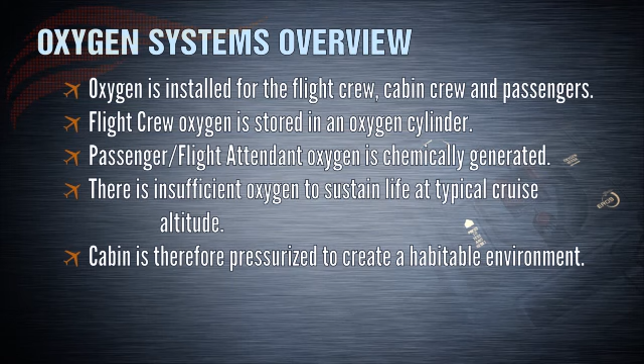Oxygen systems are installed in the aircraft for the flight crew, cabin crew, and the passengers. Flight crew oxygen is stored pressurized in an oxygen cylinder, and oxygen for the passengers and cabin crew is chemically generated. At typical cruise altitudes, there is insufficient oxygen per unit volume of air to sustain human life. The aircraft is therefore pressurized to create a habitable environment. In the event of cabin depressurization, supplemental oxygen is required to sustain consciousness during an emergency descent.

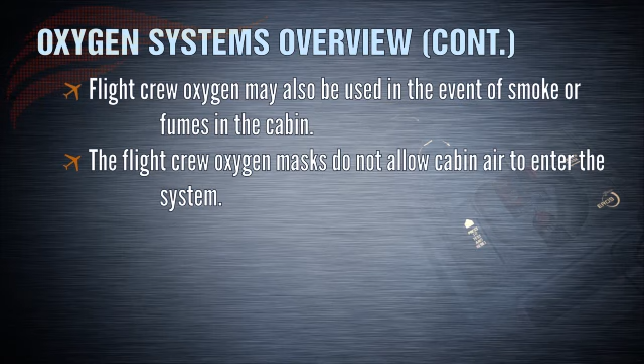Flight crew oxygen may also be used in the event of smoke or fumes in the cabin, as the flight crew oxygen masks may be sealed completely, preventing cabin air from entering the system. The passenger oxygen masks combine oxygen with cabin air, however, so will be of little use in the event of smoke or fumes in the cabin.

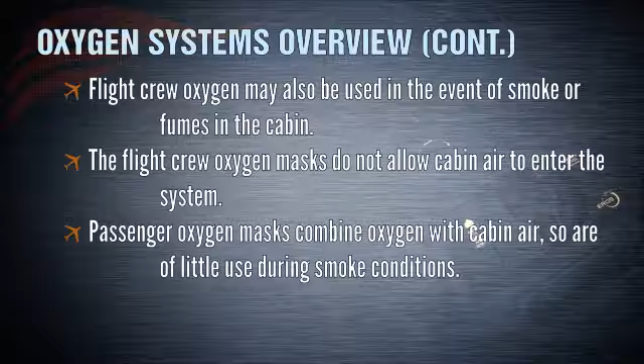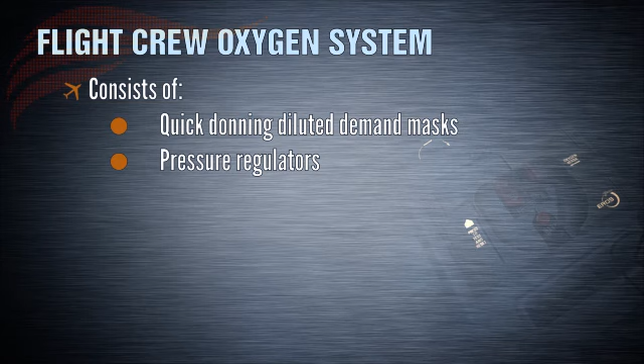Controls and indications for the oxygen systems are located on the masks beside each crew station and on the aft overhead panel. The flight crew oxygen system consists of quick donning diluter demand masks and pressure regulators located at each crew member station and other system components.

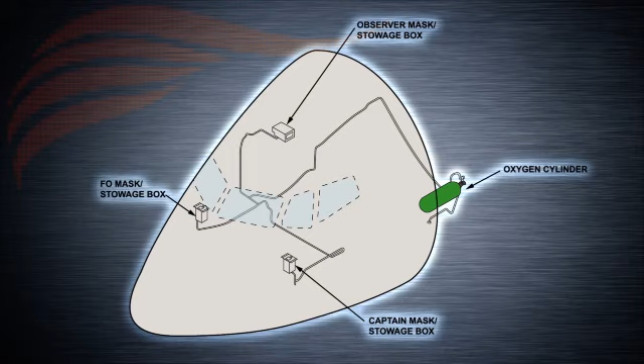There are 3 masks on the flight deck, one for each pilot and one for the observer station. These masks are fed oxygen by a single oxygen cylinder that is located in the aft electronic equipment compartment. An access panel in the forward cargo compartment permits maintenance access to the oxygen cylinder. There is a pressure indicator on the aft overhead panel, and this shows the pressure in the crew oxygen cylinder.

The masks are located to the left and right of the captain and first officer stations respectively. They are within easy reach for quick donning in the event that they are needed, and they're designed to be donned and for communications to be established within 5 seconds.

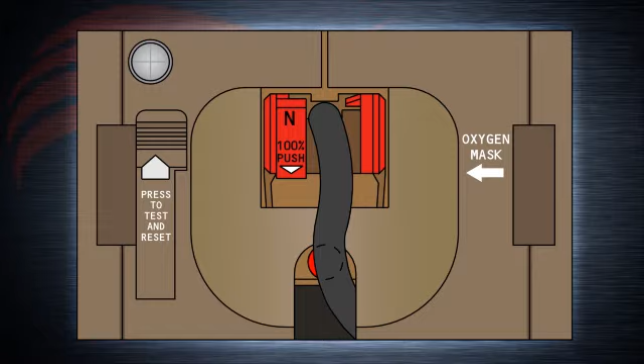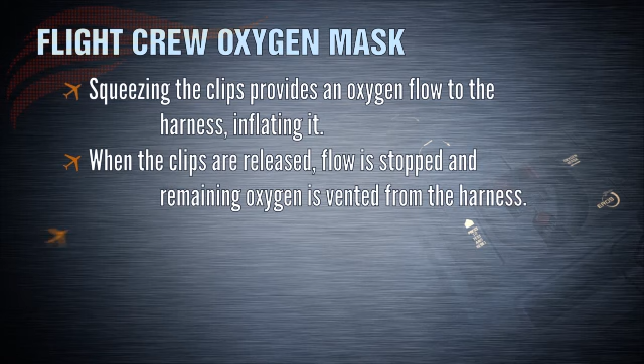The mask is removed from its stowage box by gripping the red clips and pulling. Squeezing these clips provides an oxygen flow to the mask harness, inflating it and enabling it to be placed over the head. When the clips are released, oxygen flow to the harness is stopped, and the remaining oxygen in the harness is vented. This tightens the harness over the back of the head, holding the mask to your face.

The mask regulator can provide either pure oxygen or oxygen mixed with cabin air. With the normal 100% selector in the normal position, the mask system will provide a mix of cabin air and oxygen. When the switch is pushed in, the system will provide 100% pure oxygen. This mode would be used in the event that fumes are present, as it provides pure oxygen and thus would not permit cabin air to enter the system.

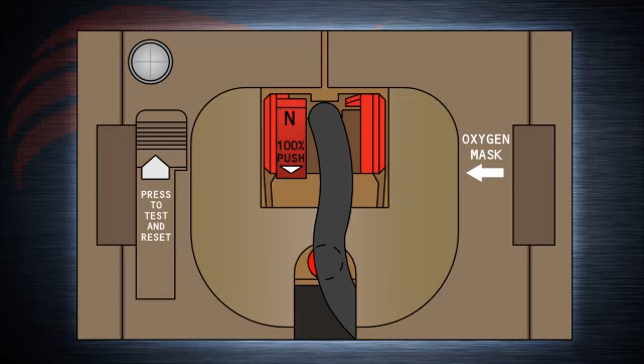Oxygen may also be supplied under a positive pressure flow. This is achieved by rotating the emergency test selector clockwise. This provides 100% oxygen under positive pressure and can be used to clear the mask of smoke or fumes, or when at very high altitude where oxygen under pressure is required.

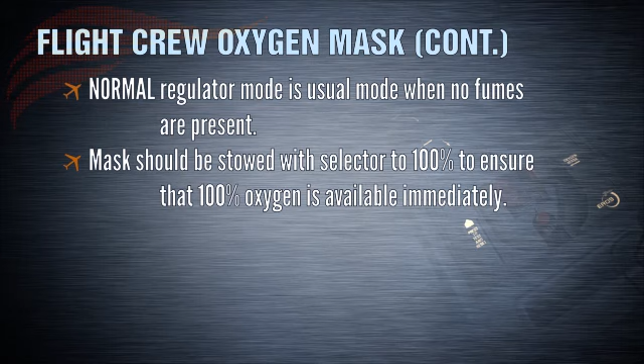The normal regulator mode is the usual mode when no fumes are present, as diluting the oxygen with cabin air allows the oxygen supply to last longer. The mask should be stowed with the normal 100% selector in the 100% position, however, to ensure that 100% oxygen is available immediately after quick donning. It's worth noting that when you're wearing the mask, you cannot actually see these controls, so it's important to be able to actuate them by feel alone.

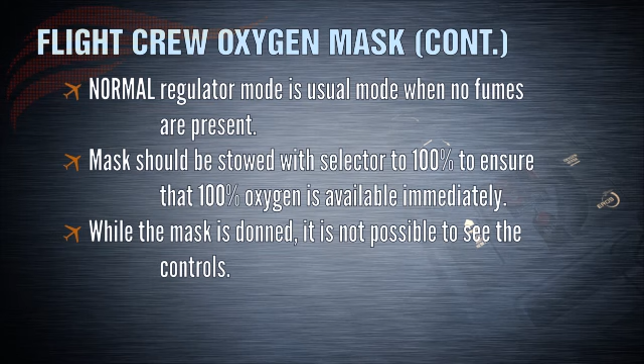The oxygen masks should be checked during initial pre-flight to confirm integrity of the system. The mask does not need to be removed from its stowage box to perform the pre-flight check.

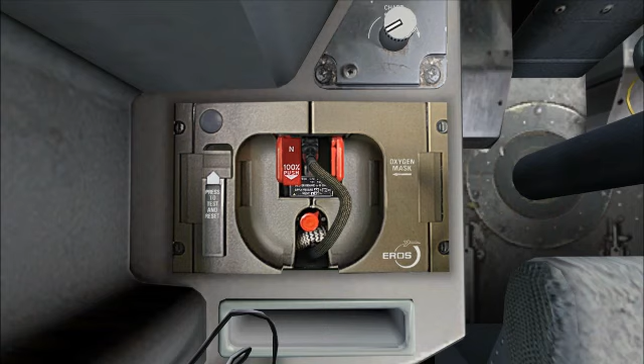To test the system during pre-flight, push the reset test switch and observe that the yellow oxygen flow indicator in the upper left of the unit shows. To check positive pressure supply to the regulator, push and hold the reset test switch while pushing the emergency test selector. Again, the flow indicator should indicate flow and should remain visible for as long as the reset test switch is held.

Each mask contains a microphone which is also tested during pre-flight. The microphone test is conducted as follows.

On the audio control panel, set the mask boom switch to the mask position to select the oxygen mask microphone for transmission. Push the flight interphone and speaker switches so that audio is heard on the overhead speaker. Then hold the push to talk switch to the intercom position and push the emergency test and reset test switches on the mask assembly simultaneously. Oxygen should then be heard to flow over the intercom as picked up by the mask microphone.

Once checks are complete, the mask should always be stowed with the normal 100% selector in the 100% position to ensure that pure oxygen is available immediately when quick donning is required.

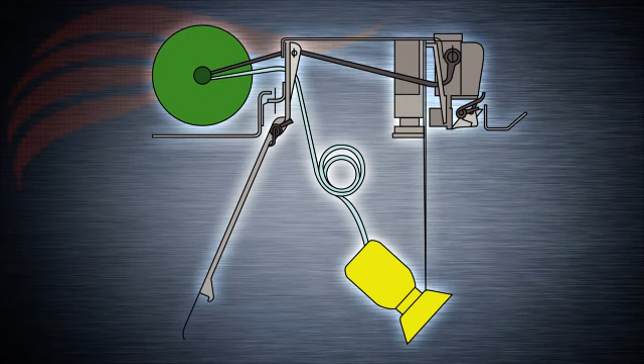Supplemental oxygen is also available for the passengers. The oxygen masks for the passengers are located in the passenger service units above the passengers' heads. There are 4 masks and 1 chemical oxygen generator per passenger service unit.

Pulling down on any one of the masks triggers a firing pin on the chemical oxygen generator that starts a constant flow of oxygen to all 4 of the masks. The oxygen generators generate oxygen through a chemical reaction by mixing sodium chlorate and iron.

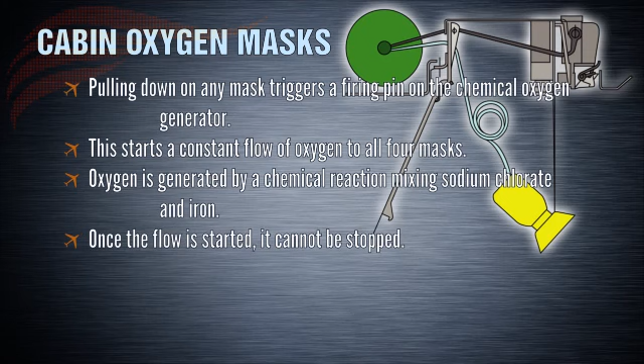Once started, the flow cannot be stopped and is constant to all 4 masks regardless of whether they are being used. Each chemical oxygen generator supplies oxygen to its masks for about 12 minutes.

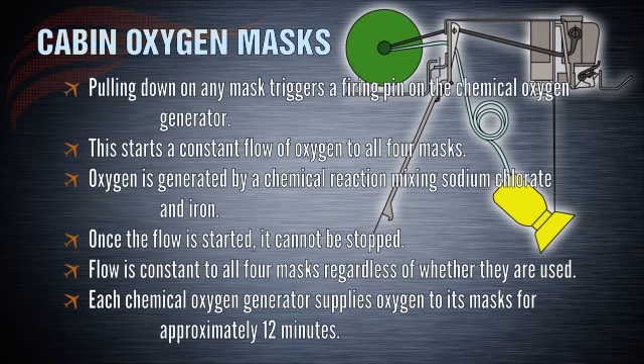There are also chemical oxygen generators and masks at the flight attendant stations and in the lavatories. In these cases, there is 1 generator feeding 2 masks at each station. Portable oxygen cylinders are also installed in the cabin for both emergency and therapeutic use.

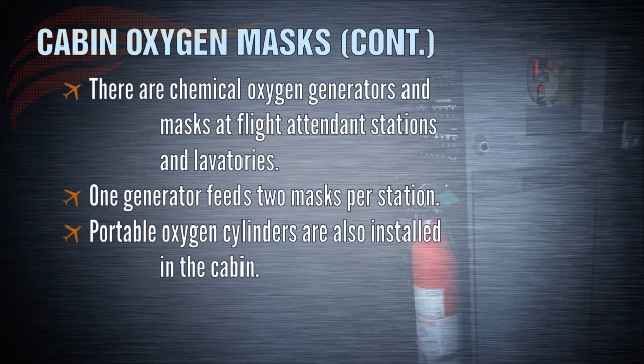Just like the crew oxygen system, controls and indications for the passenger oxygen system are located on the aft overhead panel. The flight deck control for the passenger oxygen system is the passenger oxygen switch. Other than a hard landing, there are 2 primary ways in which the passenger oxygen system can be activated.

With the passenger oxygen switch set to normal, the system will activate and the masks will drop from their compartments at a cabin altitude of 14,000 feet. The oxygen masks can also be deployed manually by setting the passenger oxygen switch to the on position.

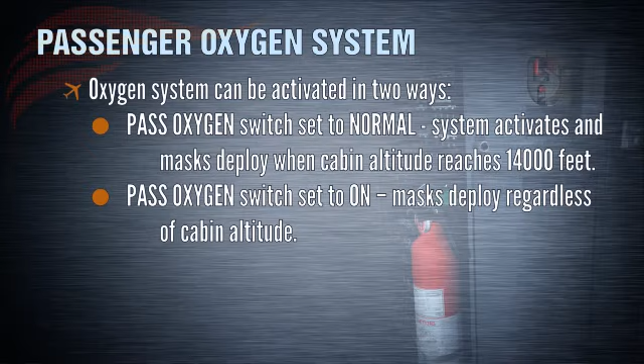The passenger oxygen on light will illuminate when the passenger oxygen system has been activated. This light indicates that electrical power has gone to the oxygen deployment relays to open the passenger service unit doors and release the masks. It does not confirm that the masks have actually dropped, however.

Illumination of the passenger oxygen on light will trigger a master caution, and the overhead light on the first officer's system annunciator panel will illuminate.

The emergency lighting system consists of lights mounted inside the aircraft and lights mounted externally. Controls and indications for the emergency lighting systems are located on the forward overhead panel.

The emergency lighting system is powered independently of the main electrical system. The internal and external emergency lights are powered by battery packs located in the forward and aft entry areas and on the cabin sidewalls. The battery packs are recharged by the main electrical system and take approximately 90 minutes to fully recharge. They hold enough charge to power the emergency lights for approximately 10 minutes.

The emergency lighting system is activated automatically when DC bus 1 power is lost. Interior emergency lighting is installed to aid egress in an emergency. The interior emergency lights include exit signs, aisle lights, and floor proximity lights.

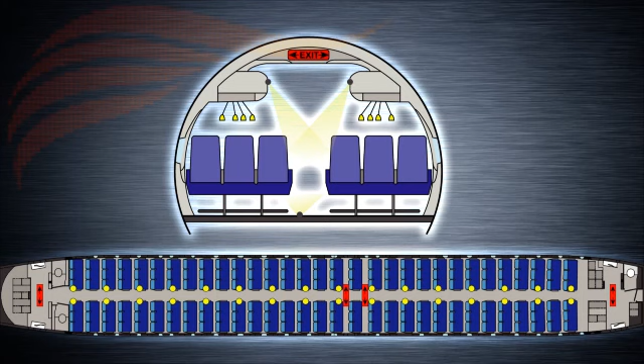Exit signs are located in the aisle ceiling and at each exit to show the location of the exits. Aisle lights are mounted throughout the aisle below the stowage bins to supply lighting to the aisle area. Floor proximity lights are laid down the left side of the aisle at floor level to guide passengers and crew to the exits.

Photoluminescent strips either side of the aisle are a customer option to aid egress. These are mounted in place of the electrical floor proximity lights and absorb photons from ambient light, then re-radiate them over a prolonged period. This re-radiation of photons is visible to the eye in darkened conditions, most useful during an evacuation.

Because the photoluminescent strips are charged by ambient light, they do not require power from the electrical system. They must still be recharged by electrical cabin lights during turnaround, however, and detailed charging information is provided in the FCOM.

On the flight deck, there is a single emergency light co-located with the dome light to the left of the flight deck door that provides emergency lighting to the cockpit. This is also a part of the emergency lighting system, so will only illuminate when the emergency lighting system is activated.

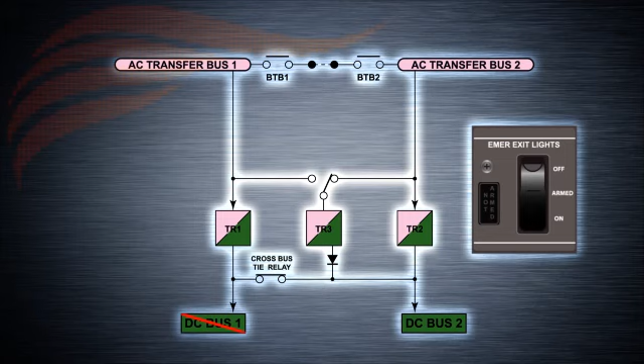With the emergency exit light switch in the armed position, the emergency light switch will illuminate automatically if power to the DC bus number 1 is lost. Loss of the 2 AC transfer buses will also cause the lights to illuminate, as DC bus number 1 takes power from the transformer rectifier units, which in turn are powered by the 2 AC transfer buses.

Exterior emergency lighting is also installed to aid egress from the aircraft in an emergency. Lights are installed in the fuselage to illuminate the escape slides, overwing exits, and the area aft of the wing to aid visibility in the event of an evacuation. The lights themselves are located aft of each exit: forward, overwing, and aft.

There is a 3-position switch on the forward overhead panel that controls the emergency lighting. With the switch in the off position, the system is inhibited and the not armed light will be illuminated. Automatic activation of the lights is inhibited with the switch in this position.

When capped, the switch is forced to the armed position. In this position, all emergency lights will activate automatically when power to DC bus number 1 fails and if normal AC power is lost, as discussed before.

The on position switches on all emergency exit lights. The emergency exit lights may also be switched on using the emergency exit lighting switch on the aft flight attendant panel in the cabin. This overrides the flight deck control and will illuminate the emergency lights regardless of the flight deck switch position.

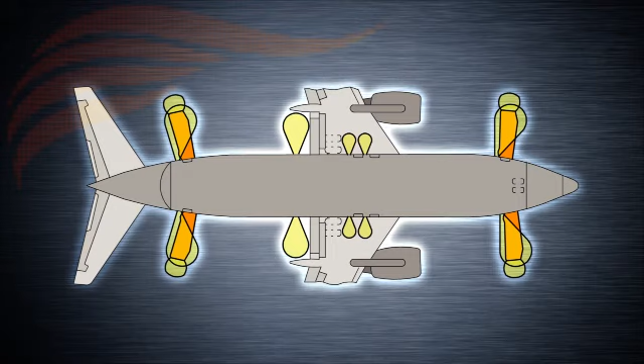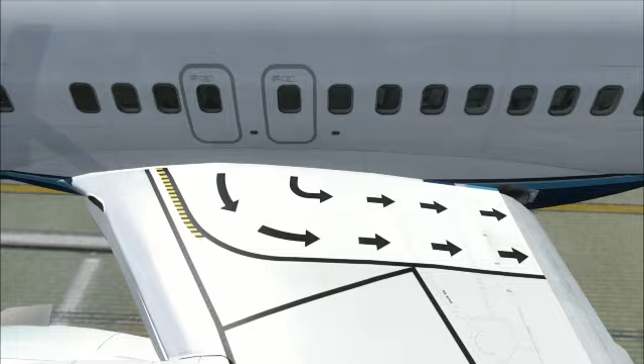The inboard sections of the wing are close enough to the ground that evacuation over the trailing edge should be safe so long as care is taken. Markings on the wings direct passengers rearwards towards the trailing edge. One item on the evacuation checklist is to select flaps 40, which should assist passengers in sliding down.

Egress from the flight deck is possible by using the flight deck number 2 windows. To open the side windows, depress the trigger and rotate the handle inboard towards you. The window will move inboard and then slide back until it locks into the open position.

There are escape straps located above both pilots' heads. It is a considerable fall from the flight deck windows to the ground, so the straps are used to hold onto to control the descent.

There was actually fairly little in this lesson that has real utility for you while flying the PMDG aircraft, and it was perhaps a little irrelevant in places as a result. But regardless of that, we hope it gave you an interesting insight into a few of the systems more noticeable to you as a passenger. Clearly there is much more equipment on the aircraft that could be classified as emergency equipment, but we've run over some of the more prominent systems and features available that help mitigate risk during emergencies.

In this lesson, we covered the flight crew oxygen system, passenger oxygen system, the emergency lighting system, and we talked briefly about egress routes from the aircraft in an evacuation. So again, in a real aircraft, consider your situation, listen to the cabin crew, and respect that safety briefing. But you knew that.